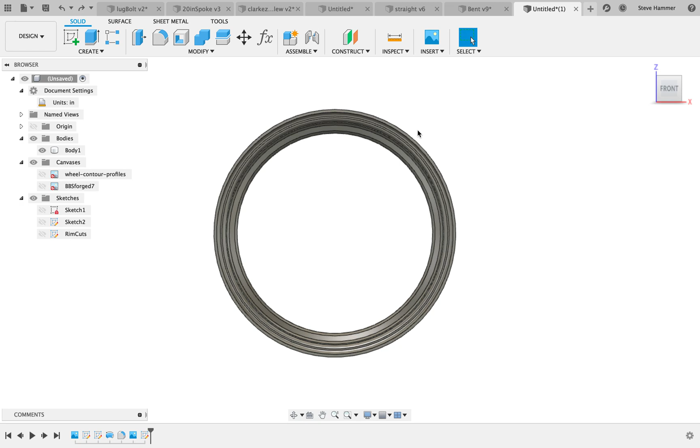In this wheel tutorial for this BBS 7-spoke rim, I've got my rim cuts that I just finished up here. Now I'm going to turn the reference canvas back on, and I'm going to hit C for the circle sketch tool and select a plane.

Now I'm going to start designing out the high points. This is the high point of the way this rim curve is going to go, and this is the low point for this particular rim. These bolts are going to sit back in an offset way, so they're going to sit back inside of the rim.

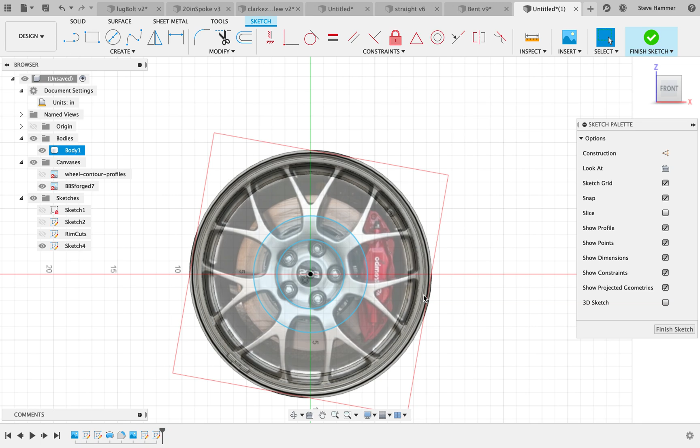Now I'm going to use a little bit of data from the sketch I just created. I'm going to turn both of these into construction sketches, and then I'm going to actually create a section analysis of this particular rim.

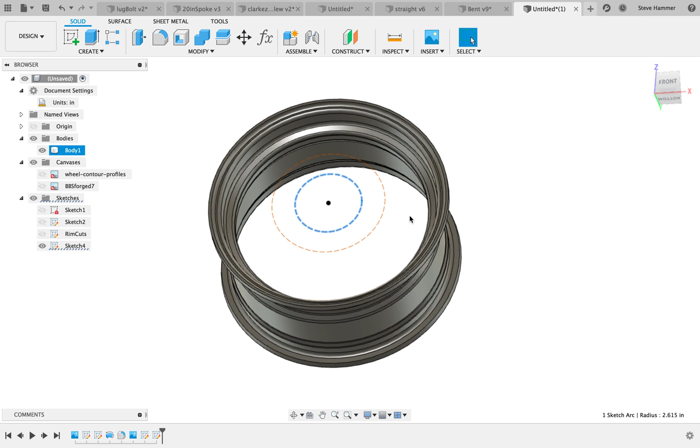So we're going to go to Inspect, then Section Analysis. We need to make sure we're telling it the right section that we want to cut everything with, and we're going to use this one. That's perfect, and I'm going to say OK.

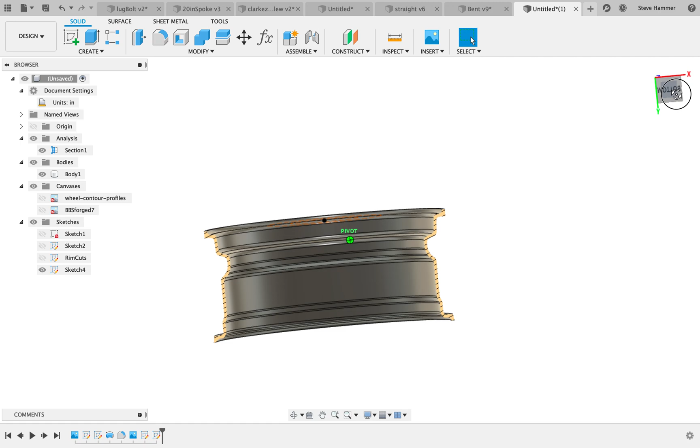Now, the way we're looking at this right here, we've got a high point that is going to be about here, and we've got a low point where all the bolts are going to sit, that's going to be down here.

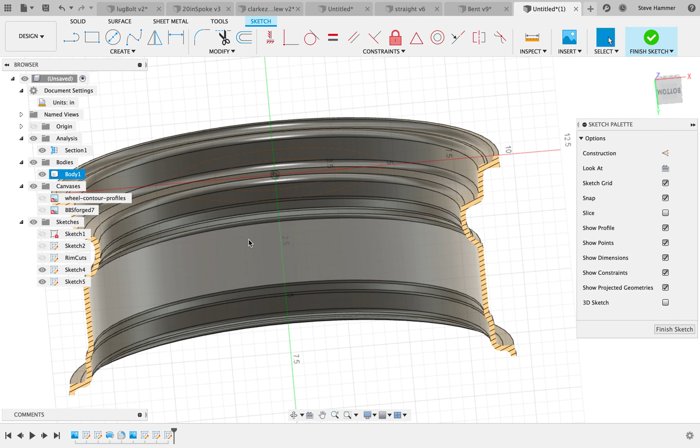So I'm going to go ahead and create a new sketch here, on this plane. I'm looking into the wheel right now, and what I'm going to do is project both of these circles onto my plane here. I'm going to hit OK.

So what this did, I hit P to turn on my projection control. This gives me the diameter of my inner bit here, and this gives me my outer bit here.

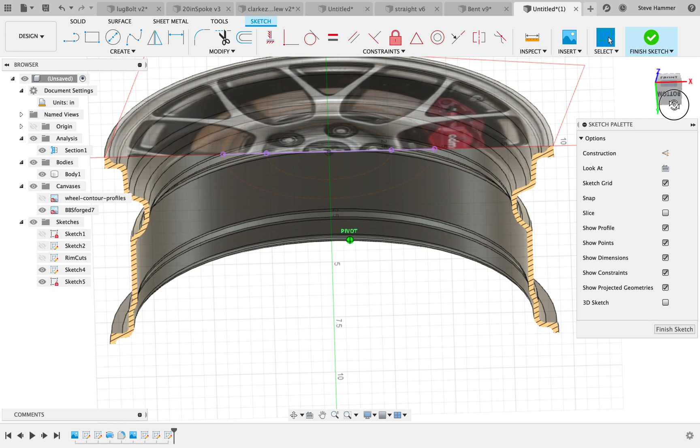If I want to look at this wheel and just kind of check to make sure I'm on the right path, I can zoom out, or I can roll around with my reference image on, and just kind of see where those spokes are originating.

Those spokes are originating here, and they are billowing out to probably about here. Then they're curving back in quickly to this point here. Now I want the bolts for this particular wheel to be about here. So there is the line for the inside.

Something weird just happened. Beach ball of doom, go away.

I'm going to go ahead and delete that little section of line. So what I'm going to do is start a spline from here, bring it out, and then it's going to come back into here very quickly. So here's my spline tool.

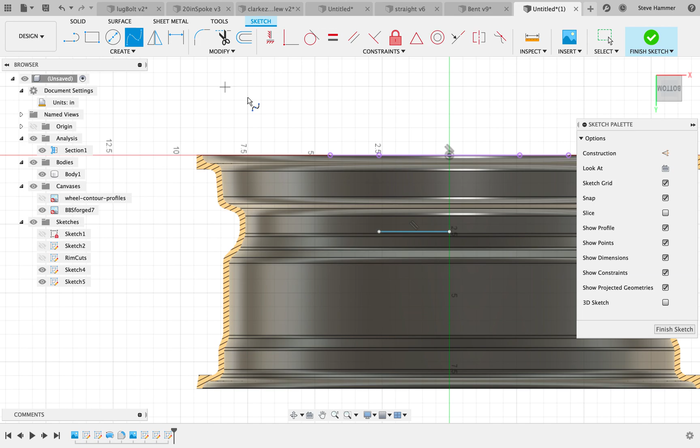I'm going to project one more time. I'm going to get out of here. So I'm going to show you guys how to get to Project.

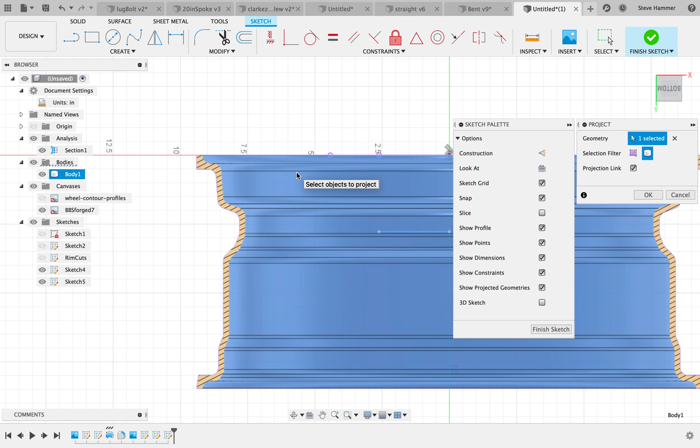I'm going to go down to Project Include right here, and I am going to project this particular body onto this plane that I'm working on. So right here, and I'm going to hit Cancel because I don't want all of it, I just want the intersection. So: Create, Project Include, the intersect of this body on this plane, and there we go.

Now we've got our intersection data here, so we can actually draw.